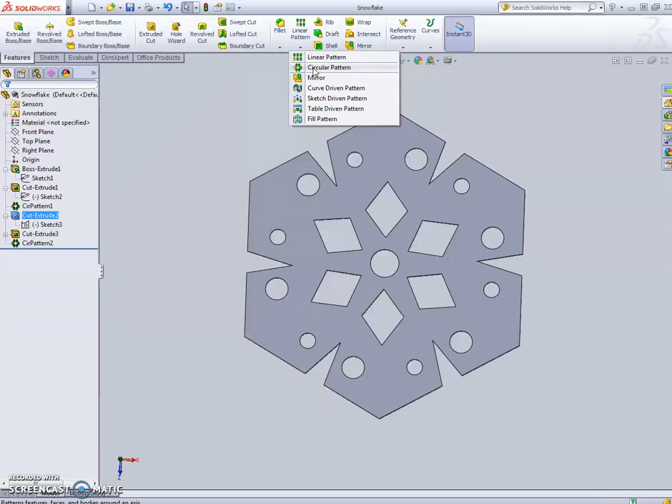In this tutorial, I'm going to show you how to use some different tools in SolidWorks that can help you mirror images or use a circular pattern tool to create something like this that has symmetry in a circular way, and also symmetry around particular axes.

To get started, we're going to create a new part. File, new. Most snowflakes, which is what we're going to create, apparently have 6 sides, so we're going to make a hexagon. One way of doing that would be to sketch a hexagon, but if I want to use circular symmetry in some of my cuts, I'm actually just going to make the triangle that's 1/6 of a hexagon.

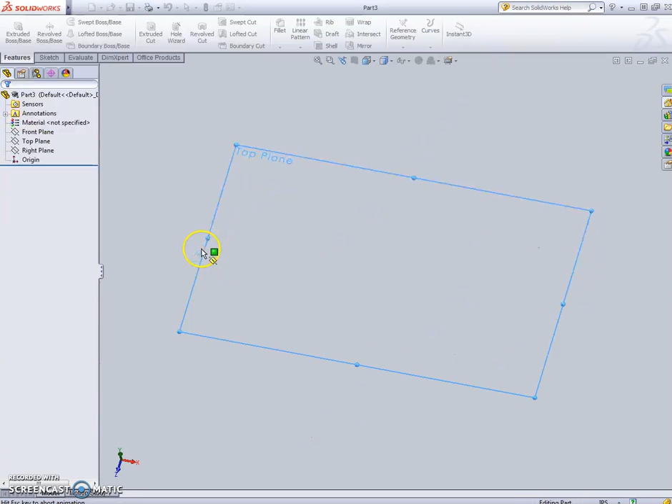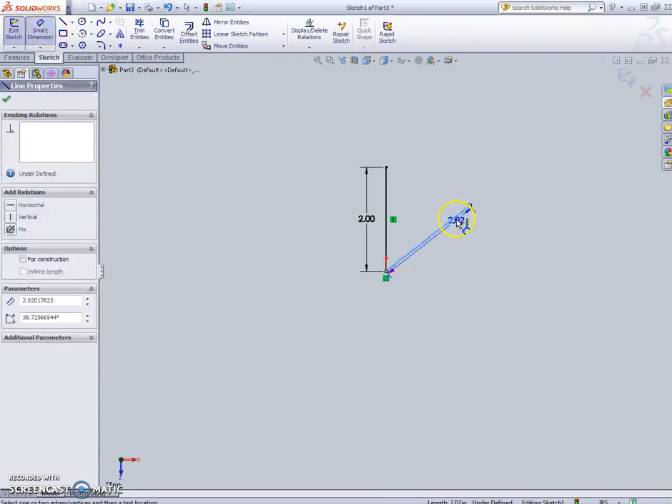To do that, I'm going to click on Extruded Boss Base. I'm going to select the top plane. In my case, I'm going to make the snowflake about 4 inches tall, which means the first line that I'm going to draw, which is going to be part of our triangle, is going to be 2 inches tall. I'm going to draw another line, also 2 inches long.

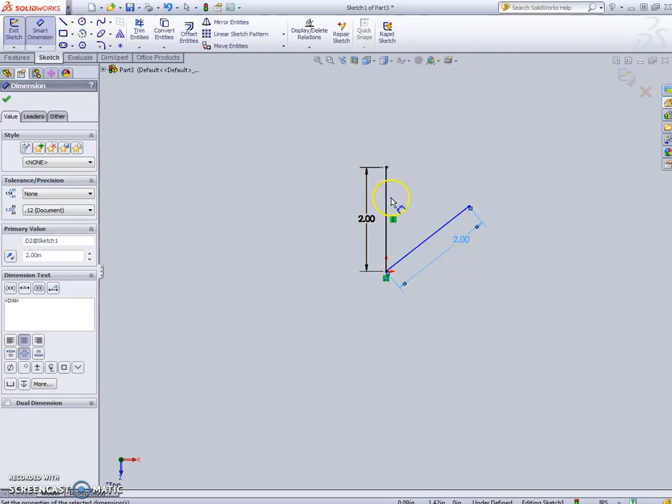These two lines I'm going to make a certain angle apart. A whole circle would be 360 degrees. I want this angle to be 1/6 of a circle, so I'm going to make it 1/6 of 360, which is 60 degrees. To get that dimension, I'm going to click on one line, click on the other line - this is using the Smart Dimension tool - and then place that angle measurement out there. I'm going to type in 60 degrees, or just 60 is fine.

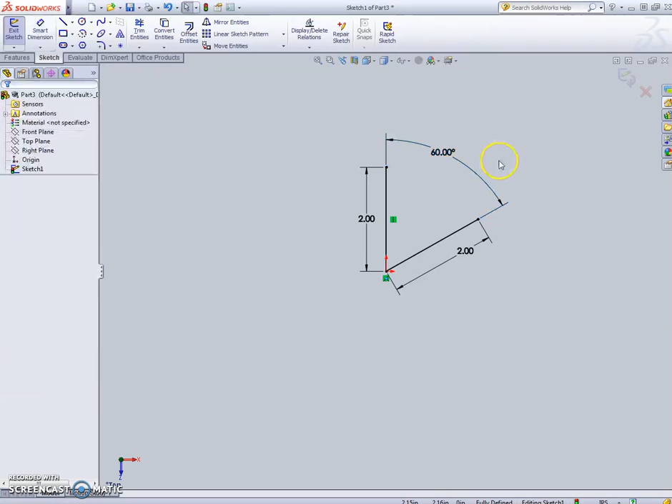In between each of these, going from the line to Smart Dimension, I've been clicking Escape on the keyboard, then going back to line, drawing a line, clicking Escape, and we're done with that triangle. Next, Exit Sketch.

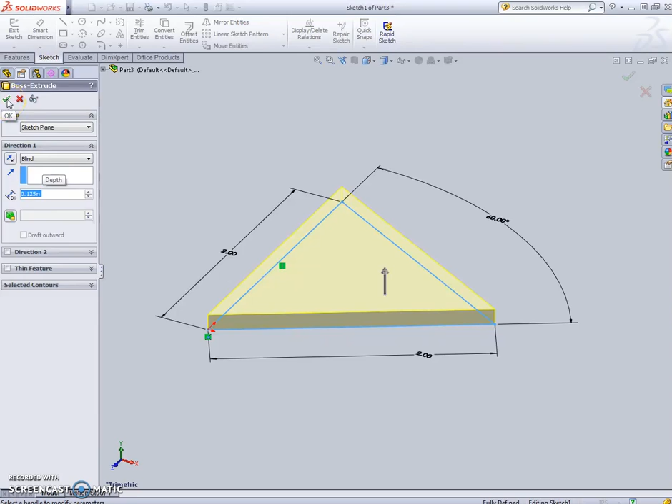Since we started off by clicking Extrude Boss Base, it asks us how tall to make it. I'm going to do 0.125 inches, which is the thickness of a piece of 1/8 inch plywood, which is what I'm going to be laser cutting this out of. You could also 3D print or laser cut this, depending on what tools you have available. Check mark - so this is a triangle. If we look at it from the top view, this is going to be 1/6 of our snowflake.

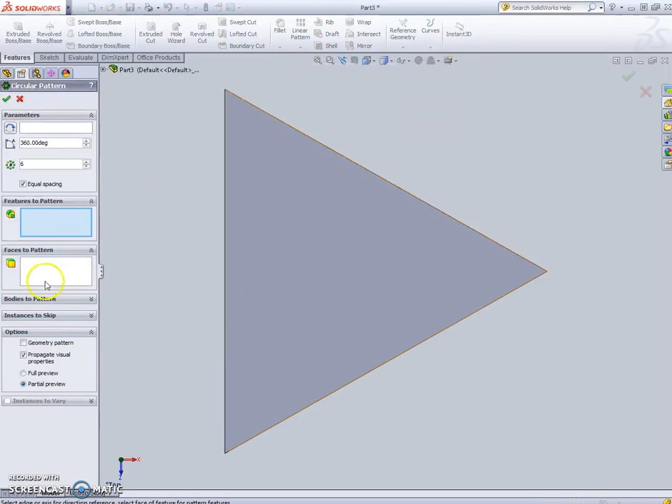Next we're going to use what's called the Circular Pattern tool. Up in the Linear Pattern button, if you click the arrow underneath, it has lots of different options. I'm going to click Circular Pattern. Under Features to Pattern, I'm going to click on the triangle that we just made. If you hover over the first box, it says Pattern Axis, and we want to revolve this around that axis. So I'm going to click on that line, and there you go.

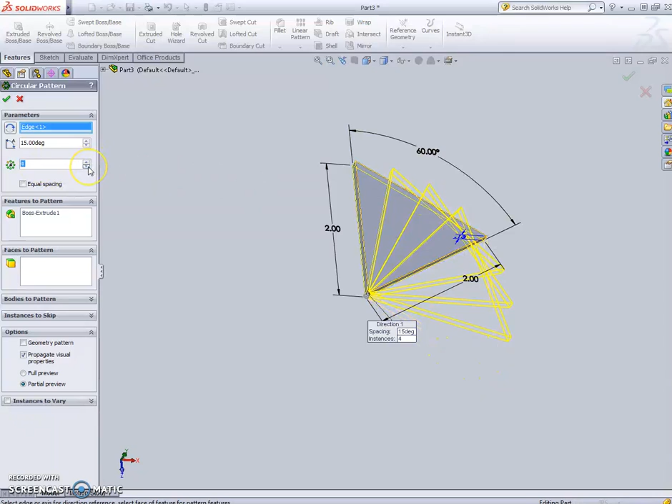This is already saved settings for me from when I created this just a few minutes ago in practice. Yours might not have selected equal spacing - it might look something like this. In this case, it says that in between each pattern, it's going to be 15 degrees, and it's making 4 of them. Or you could decrease that, and it's only making 2, 15 degrees apart.

If you click the equal spacing button, it'll figure out how to space this number equally around 360 degrees. I'm going to make it 6 of them fit around 360. That looks good. Check mark. Now we have a hexagon.

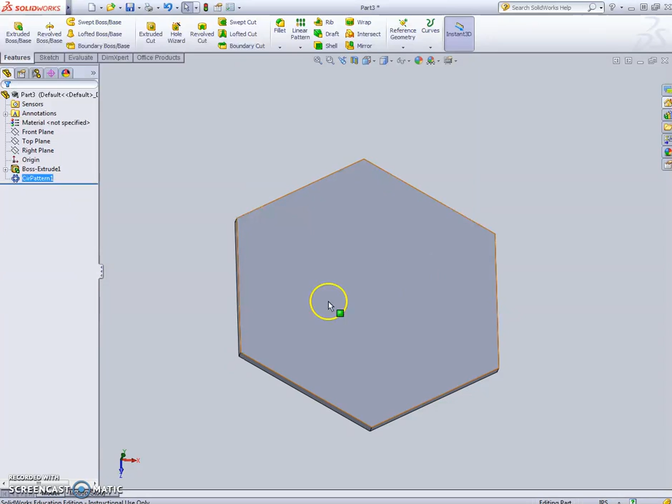Next, I'm going to still imagine that first triangle that I drew and cut some holes in here, and then we're going to use the Circular Pattern tool again to go around and make those holes follow a pattern. So I'm going to click Extruded Cut. I'm going to select just this whole piece, and then I'm going to cut some holes - how about here, here, maybe another one right here.

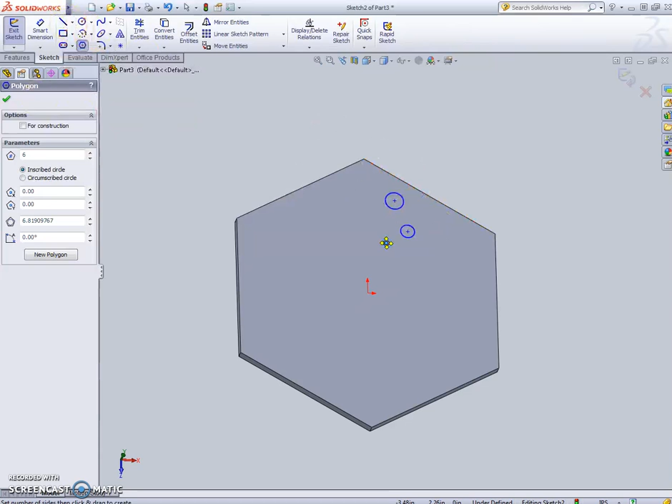I'm using these circles - you could take other things, you could do octagons or draw some of your own shapes. I'm just going to put 3 circles in here. Check mark. Exit Sketch.

This is asking me how far I want to cut. It's cutting all the way through - that's good. Check mark. And there we go. So right now that didn't repeat it yet, but now I can do that.

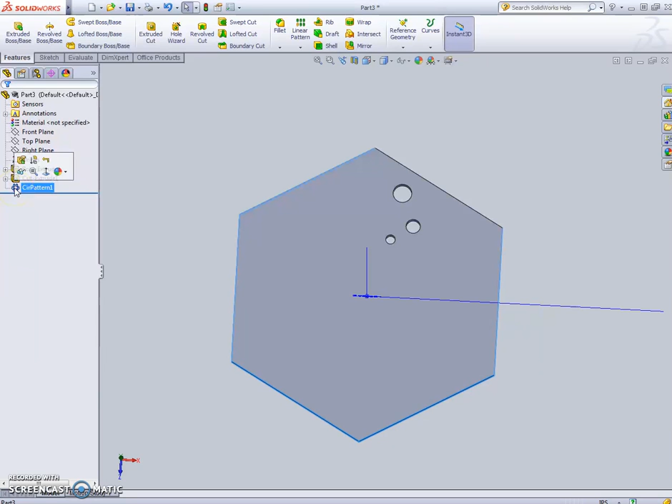I'm actually going to go back to our Circular Pattern tool. Before that, I'm going to drag this up in front of the circular pattern so that the circular pattern can reference it - that's just changing the order that I did those things. Then click on the circular pattern tool, click once on the icon, and then click once on edit feature.

Now, so far what it's repeating is just the extrusion, just the original part. If I click in this box, I can also select - it's not working - select the circles. Actually, here's how to do it: if you click, so I clicked in this box, click up on the top left, it says Feature Manager Design Tree.

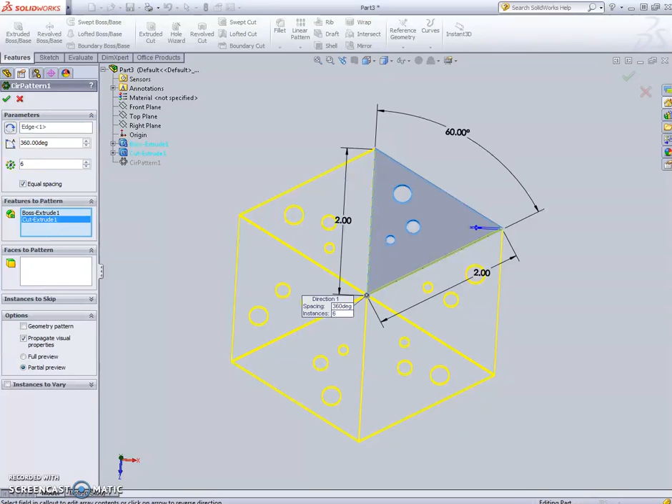That will open up all of the parts that you've made so far. If I click on Cut Extrude 1, it also adds that to the Features to Pattern. Now that I've done that, I'll click check mark, and there you go. Those holes are repeated in a circle just like we repeated that original triangle.

Okay, so that's one step of making our snowflake. Here's some other things we can do. We can use some tools to mirror some of our other cuts.

So I'm going to sketch what's called a center line. This is basically an imaginary line. Clicking on the face, click point to point. This is an imaginary line that I'll make go right through the middle. Hit escape because I only want one. That won't show up on our actual part, but we can use that line as a reference as we're drawing things.

Next, I'm going to click on a line, and I'm going to try to make a sort of triangular shape pattern right here. Both of these points I'm putting directly on this line. And I'm going to complete this by bringing it all the way up there. I'm going to hit escape.

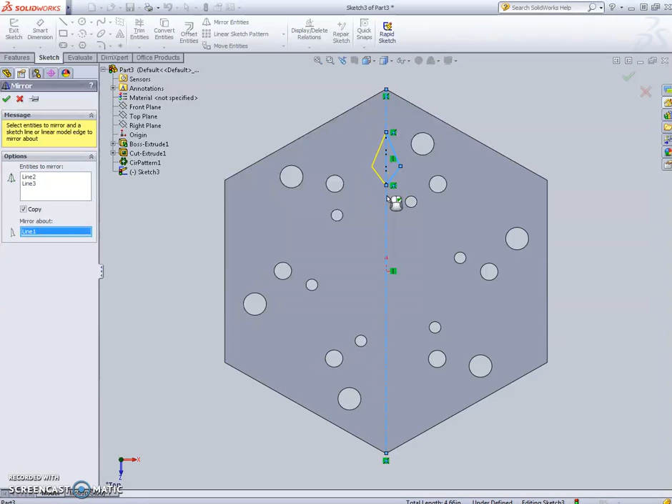And then there's also a button here I'm going to click called Mirror Entities. Entity is another word basically for thing. This line and that line, that's what I want to mirror. And I'm going to mirror it about an axis. The axis I want to mirror it about is this imaginary line that we drew. When I click check mark for that, you'll see that it mirrors that and makes a pattern.

Exit sketch. Now, this sketch, I also want to do a cut for. So I'm going to go into Features, Extrude Cut. When it says Selected Contours, I need to select the actual region that I want to cut. So there and there. Click check mark. And I've got that cut.

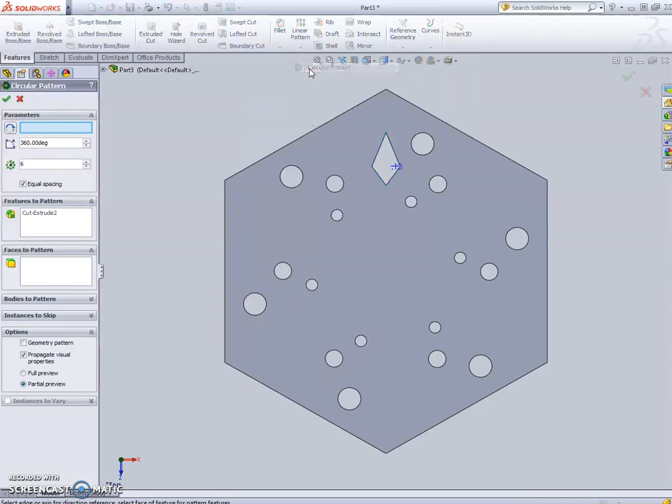All right, next, to make this look more like a snowflake, I'm going to click on the cut, and then I'm going to select the circular pattern tool. Since I already clicked on the cut, it knows that's the feature I want to make a pattern of. Oh, and I'm just realizing now there's a problem. I don't have anything that I can easily click on for the axis.

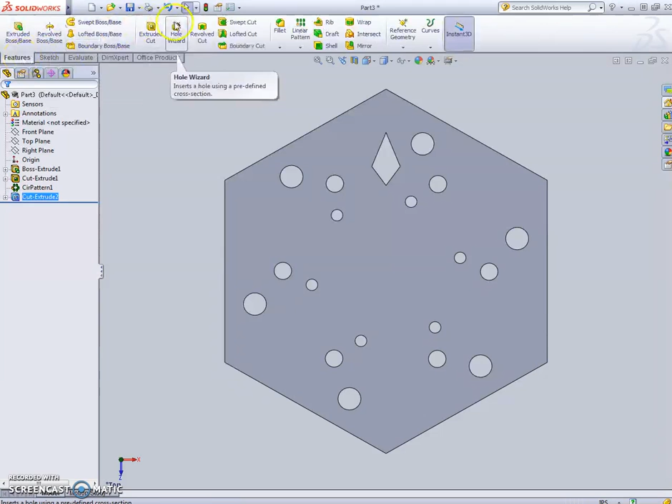So I'm actually going to go back a step and create an axis. I'm going to sketch, and make a new extruded cut on this face. I'm going to cut a circle, and make sure that circle starts in the very middle. The exact size doesn't really matter. That looks good. Exit sketch. Cut all the way through, yes.

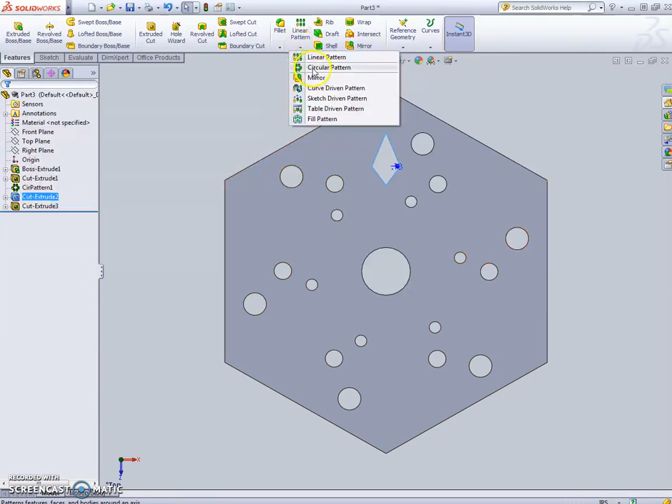Now, going back to our cut extrude number 2, that diamond, hit the circular pattern tool. The feature to pattern is that extrusion right there. The reason I needed to cut a circle is I needed an axis for this to be revolved around. So if I click on this again, which says pattern axis, I can select that circle, and it's going to revolve that around the circle.

It has the same default settings as before. It's going to go 6, spread around 360 degrees. I could change that if I wanted to. I could try 12 or 10. Those things won't really fit the way I put my circles, so 6 looks good. Okay, check mark, and we're done with that.

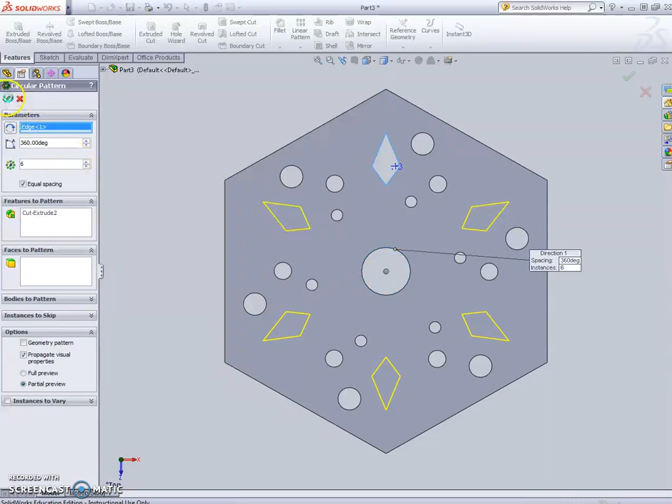All right, so that's starting to look a bit like a snowflake. A couple other things you could do. We could do some cuts on the edges.

And actually, I'm going to go back to this cut extrude, click plus, so I can see the sketch. Click once on the sketch, once on edit sketch. Oh, sorry, wrong one. Cut extrude 2 is what I want to look at. Plus, click on the sketch button, and then edit sketch.

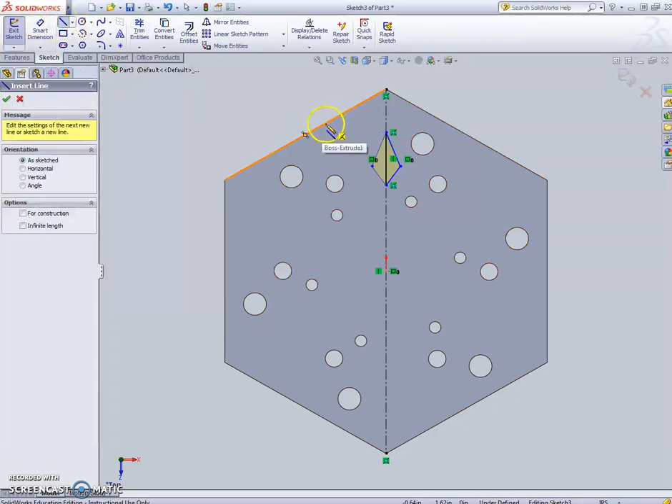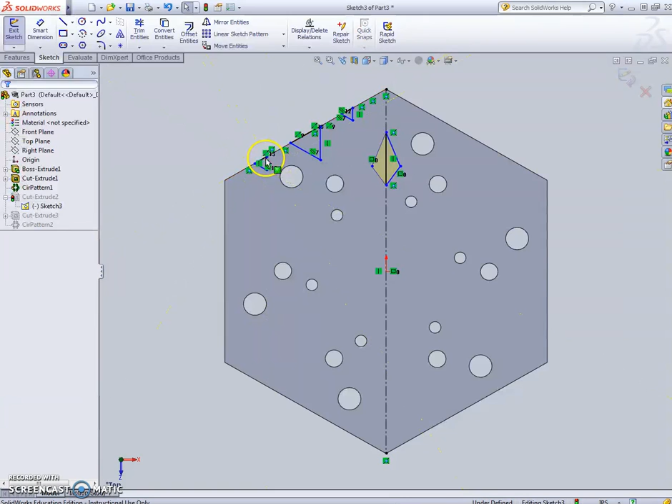And then I'm going to draw some other things that I also want to pattern. So let's say I also want to cut out a triangle kind of right around here. How about some smaller ones right here? And here. So you can see I'm not really caring about dimensions so much. If you want to, you can. I'm just doing this visually, something I think looks good.

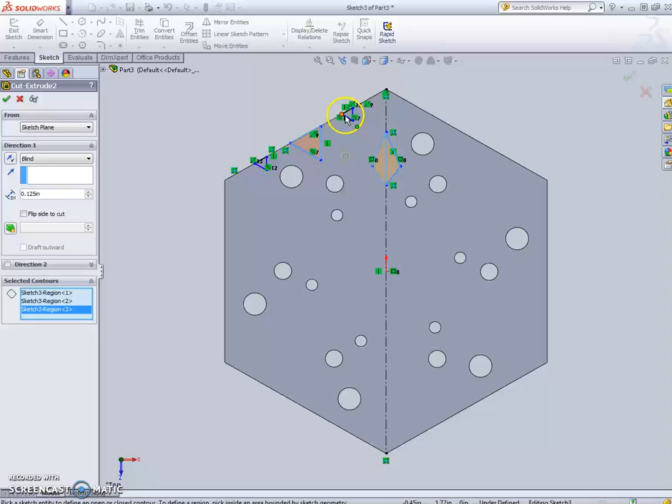Exit sketch. Now going back to extrude that cut that I made, I'm going to edit the feature. Right now the only contours that are selected are the ones that I selected earlier. So I click on selected contours, and I'm also going to check mark those other triangles that I just made. All right, check mark to be done. Whew. And you can see that that repeats that pattern throughout the whole thing.

Okay, so this is just one way of creating a snowflake. There's some other options too. The main thing I wanted to show you is how to use the circular pattern tool and how to mirror things, and a few other tools along the way. All right, good luck making your own snowflakes.